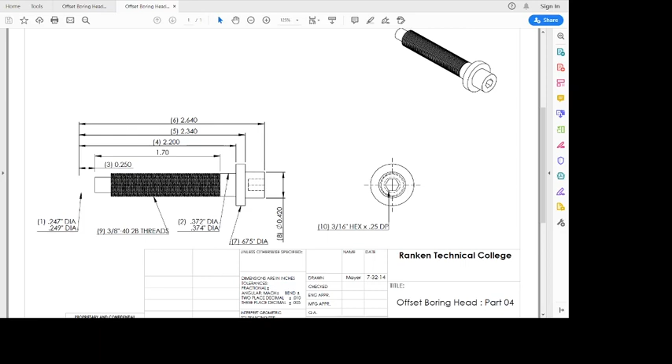As you can see, nothing incredibly complicated here. A pretty straightforward part. On this print, it says to use 1018. I have a lot of students that have used brass. I would prefer using brass if I was making this myself, because you're probably going to have a smoother motion. It won't last as long; the brass will wear down quicker than the 1018 screw will, but it's going to be smoother. It'll look cooler, all that fun stuff.

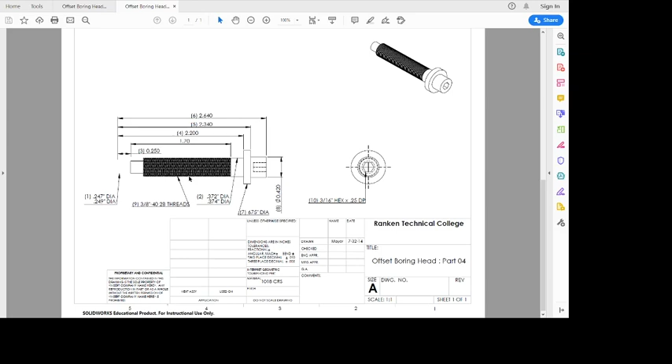So nothing incredibly complicated with this. The only new thing we're really going to be dealing with is this thread. We're going to make an external thread on this. If you haven't noticed yet, when you use the hole wizard, there's a function on there to make an external thread. So let's get started. We are going to make a new part, so I'm just going to use my 3 decimal place template and get that going.

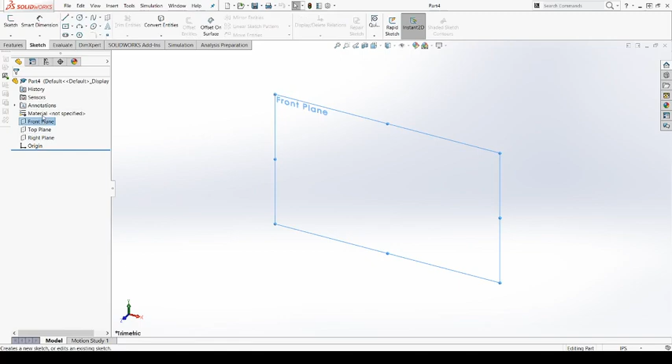All right, so again, we have a revolved part, or a round part, so that just kind of screams out revolve me. Same as last time, we're going to go front plane, and we're going to create a center line. Again, don't have to do this. This is kind of a personal preference. Some people probably say that this is a waste of time, but whatever. Some people used to say that about washing hands.

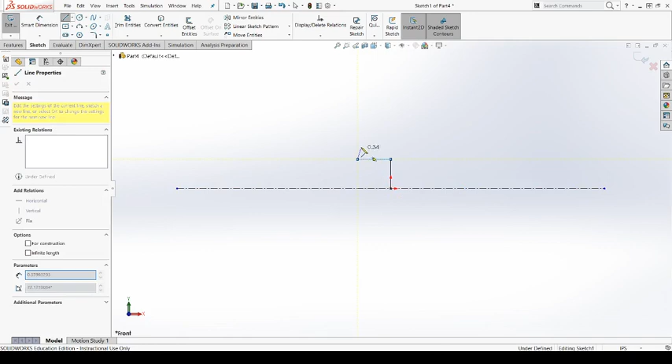All right, so we're going to create just the general outline of the shape. We're not going to get hung up on making this perfect. The biggest thing we want to do is try to avoid snapping if possible. Just rough shape, nothing crazy. From here, I'm going to do my length dimensions first. So overall length is 2.640 inches.

Our... what is going on with this part? All right, I just noticed something's goofy with our print. So I will draw this up. Maybe we'll hold off on Mastercamming this until next week. Next week I was going to get into assemblies and using assemblies to verify our part. So we'll just draw this exactly how it is.

We have this gap here of 1/4 of an inch from this section of our part to whatever this is. I don't know what that is. So we'll draw it like it is, see how it works, and then if we need to change something after the fact, we will. I do not remember seeing this before, so good times. All right, we're just going to draw it like it is in our sketch.

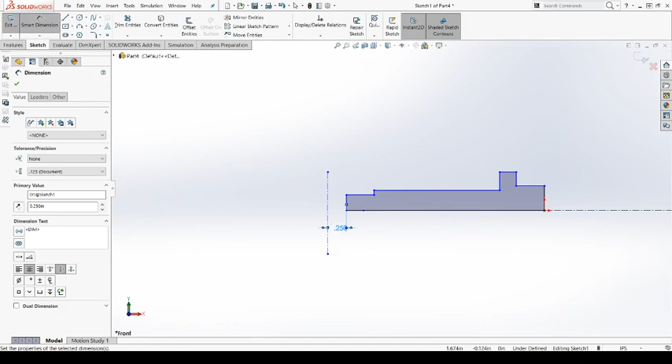Here I can dimension this off of my part. That's going to be 1/4 inch. And now I can just dimension the rest of my part. From here to here is going to be 2.640 inches. From here to here, 2.340 inches. From here to here is going to be 2.200 inches. And then from here to here, it's going to be... oops.

Let's say this is 1/4 inch as well, because that looks like about how long it is. I'm guessing this is just misdimensioned. But anyway, we're going to draw it how it is, so I can show you how this verification part works. All right, so our diameter here is going to be .420.

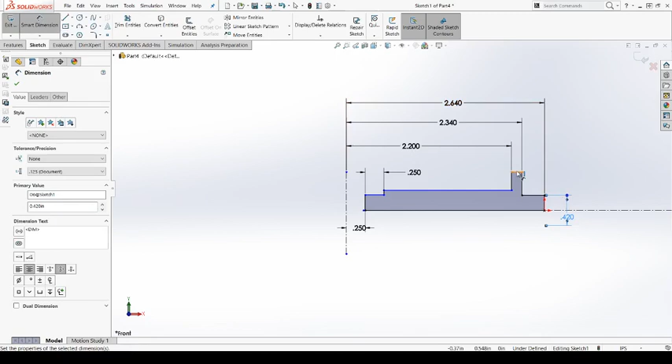My diameter here is .675. My diameter here is going to be .374. And my diameter here is going to be .249.

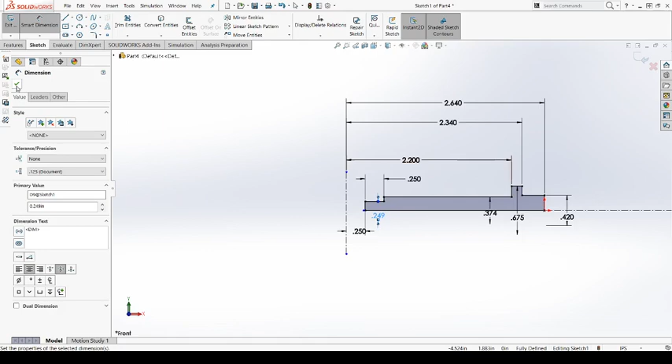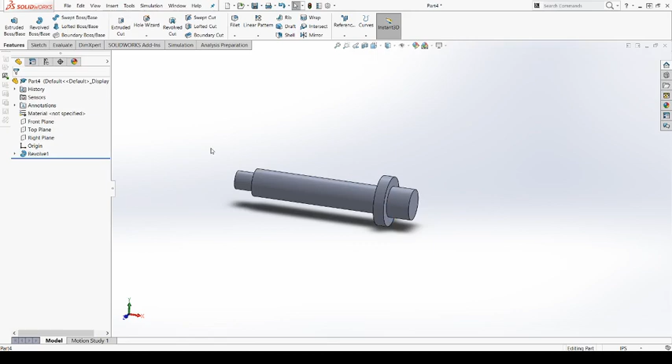Okay, so then from there, I'm just going to do a revolve. Oh, wasn't smart enough to figure out where I want to revolve around. So I'm going to select my center line. And there we go. All right, so we got our shaft here. I'm going to change material just because brass is pretty, right?

So looking back at our print, we have just a couple things to do. So on our print, the only thing we don't have at this point in time is our thread here and this hex on the end, right? So you'll drill a hole here, and then you'll take your broach and you'll basically crush out the brass from the inside of that hole.

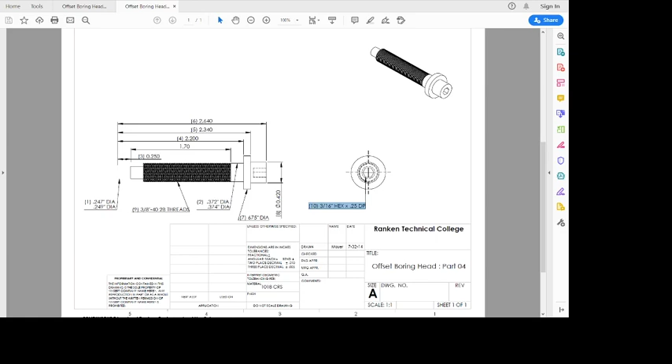All right, so in order to do that is actually pretty simple. We're going to normal to that. I already have the end of my part highlighted, so when I go and create a sketch, it is going to create that sketch using this as my sketch plane. And then from here, I'm going to go and use my polygon tool. So my polygon tool, I'm creating a hex, right? So a hex has 6 sides.

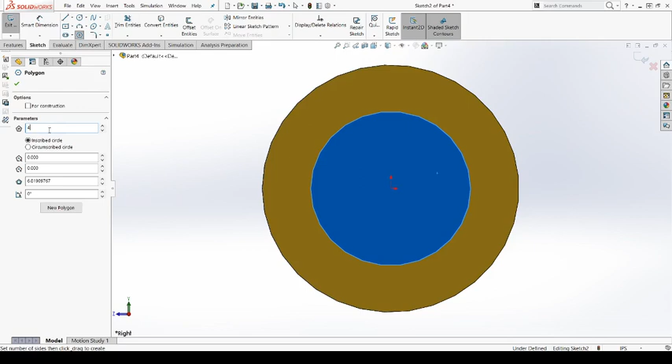If I wanted to create a decahedron, right, I could do that. It's not what I'm looking for. I guess decahedron is 10. All right, so I'm going to look at this. This is a 3/16 hex. So I believe that is an inscribed circle. So we're going to do 3/16 there. I'm going to click. Oops. I'll create that as 3/16 there.

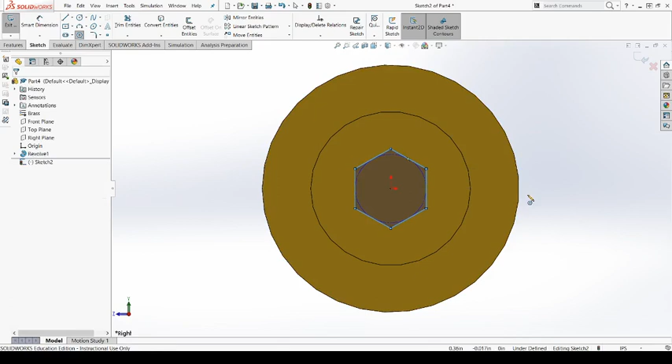All right, and then from there, all we're going to do is just an extruded cut. So that's going to be 1/4 inch deep, so we'll just put .250 for the depth. We'll click OK. All right, it's just that easy. All right, and then the last thing we got to do is you have to thread this.

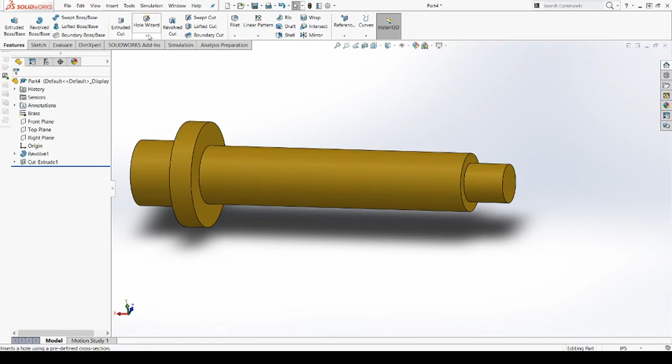Right, so another nice thing about Solidworks, way easier to thread in Solidworks than it is in real life as well. So Hole Wizard depends on the version of Solidworks you have. This is actually relatively new that you can do this external thread in this manner. It used to be a lot more complicated. You used to have to create a helix down here. And you know what? How about I show you the easy way, and I'll show you the hard way. So if we create a thread.

All right, so it's going to give me a warning. So to create a thread, I have to create my thread location. So it's going to say, what's the edge of the cylinder that you're creating this thread on? So also fun fact, it will decide really weird threads based on the diameter of the shaft. So with this, it's a .374 diameter. So you would think that it would default to a 3/8 type thread, but in fact it defaults to a number 0-80. I'm not sure how you make a number 0-80 around that, but anyway. Oh, I forgot about that.

So what we're going to have to do is create the pitch of this because this is a non-standard thread. If we do our thread, it's going to have a standard list of threads that are available to us. So for 3/8 threads, the standards they have are 3/8-16 and 3/8-24, right? So UNC, which is the 16, and UNF, which is the 24. Well, that doesn't really work for us because we need a 3/8-40, right? So we can go in here and change this. If we go down to our pitch, we're going to override our pitch, and we're going to say this is 1 divided by 40, or 25 thou.

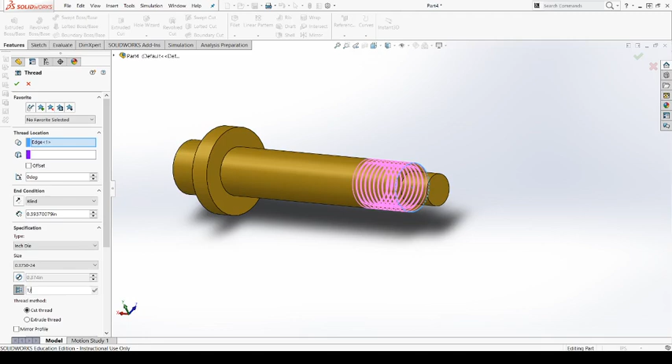All right, so this is an inch die. One way to think about this is if I had to thread this with a tool other than the single point threading tool, what would I use? As an external thread, I would use a die. If it was an internal thread, I would use a tap.

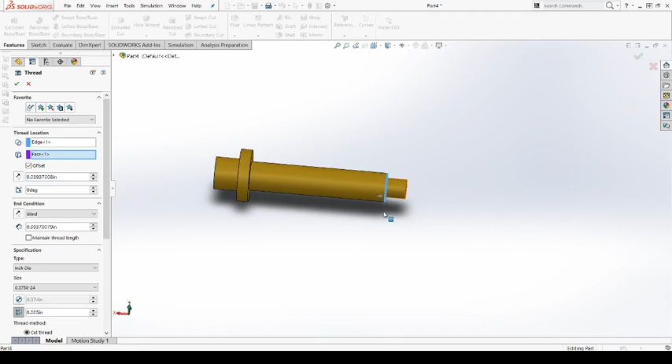So this is our thread location. This is going to be our optional start location. So I'm going to have this as our start location, and then we're going to offset this very, very slightly. Well, we can offset it however much we want. We'll say 0.1. All right, and then end condition. So we're going to do a blind, and this is going to go up 1.700, 1.7 minus 1/4 inch.

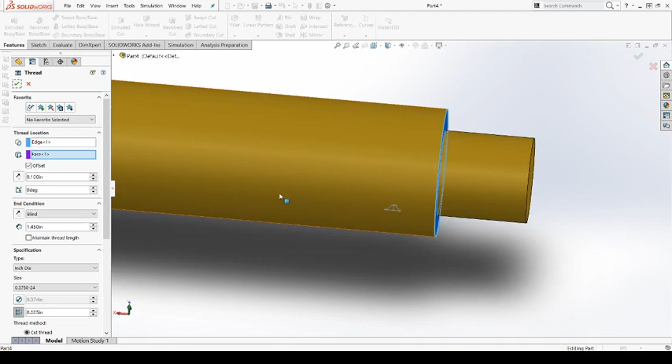What's going on here, guys? Well, it doesn't like my thread. Okay, well, you know what, we'll do it the hard way. This is not something you have to do, in fact probably not something you want to do, but I'll show you how I used to have to do this to create an external cosmetic thread.

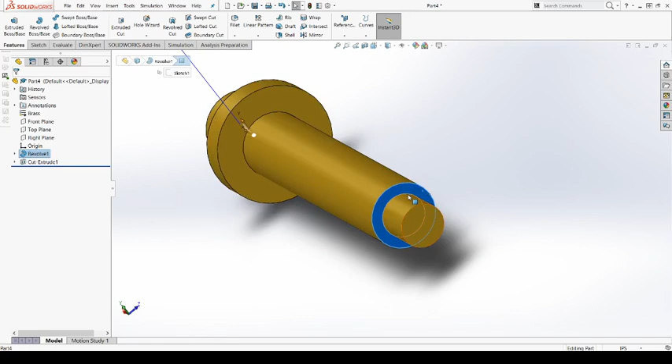So what I'm going to do is create a reference plane because I need to start this thread off of this surface. If I start it on this surface, it's going to have half a thread in my part and half a thread out, so it would start centered on my part and ravel or spiral around. So I'm going to create a reference plane.

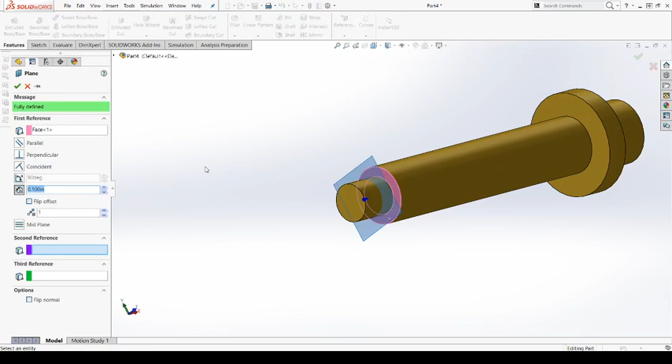I'm just going to offset this off of that part by 100 thou. I can create a plane in reference to almost anything. In this case I'm creating a plane based off of this surface, so by default it creates that plane parallel with that surface, which is exactly what I want. I can change it after the fact to have used different relations to figure out where it is.

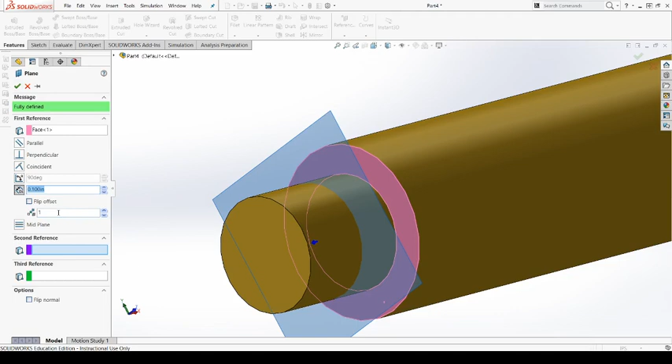In this case I only need one reference for this plane because I'm creating an offset plane - really the only reference I need is what it's parallel with and how far away from that plane it is. I can flip the distance, increase or decrease it, whatever. I'm only going to create one plane, so I'll click OK. Now I have this plane hanging out here, so I'm going to go normal to this plane and create a sketch on it.

Now I'm going to use a tool we haven't used yet called Convert Entities. What convert entities does is create geometry that matches other geometry in a different sketch. So what does that mean? Well, if I'm going to create a spiral, I could just draw a new circle in my sketch, or I could take this circle and convert entities. Hopefully you saw what happened there.

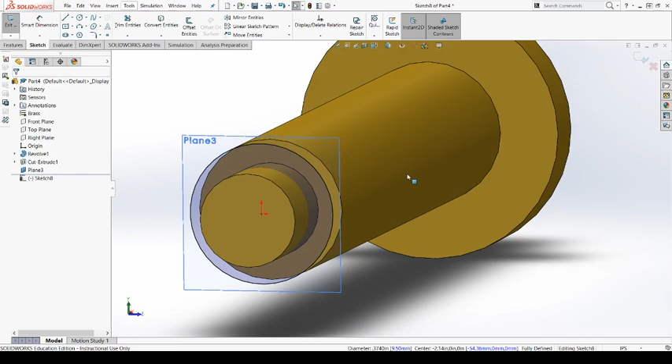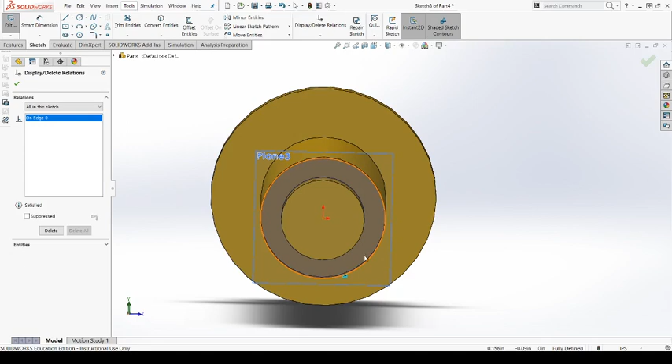I'll undo it real quick. So if I select that circle and select convert entities, it's going to take that exact same circle and put it on my sketch plane - copy it and put it there. At the same time it creates a relation between my sketch and the original geometry, and that's what that on-edge relation is. The on-edge relation just means the edge of this line matches the edge of that line, so the edge of this circle matches the edge of my original circle.

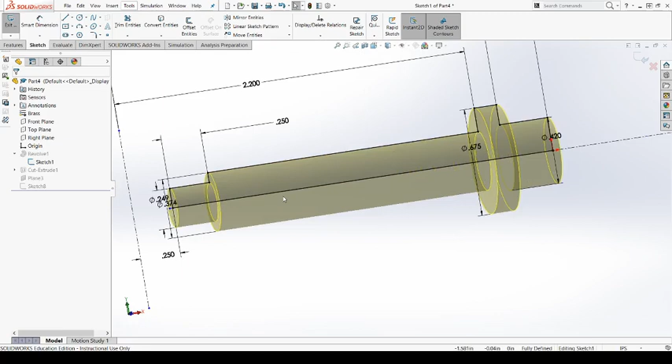The reason this is useful is if I need to change this circle. So if I go into my revolve, go into my sketch - oops, wrong button - I'm going to close this sketch and open my revolve instead. If I go in here and change the diameter, instead of saying 374 I'm going to say this is 450, so obviously significantly much larger.

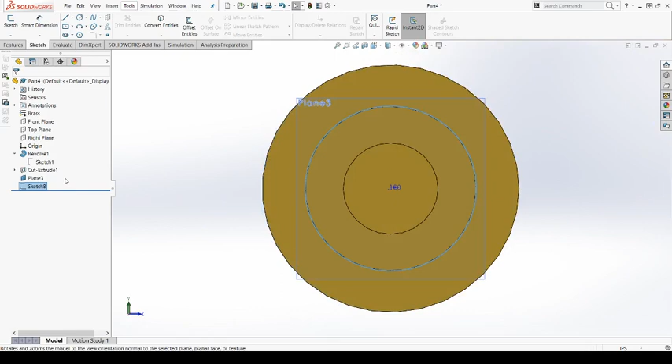When I click OK, what you'll notice is my plane on plane 3 in sketch 8 changed to match my diameter, because since it's on edge, it's just going to match this circle. I don't have to go back - I can just hit undo, and then close.

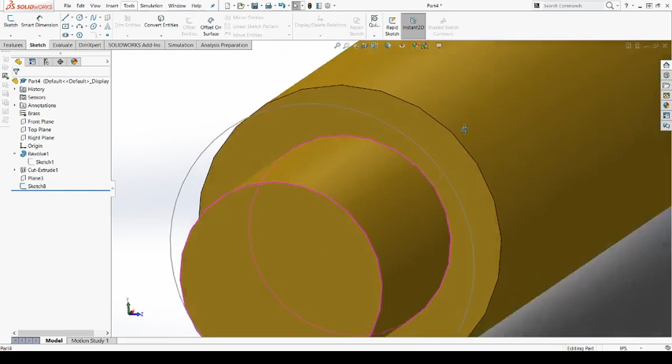Anyway, so I have my original geometry for this guy. I'm going to hide this plane at this point - if I right click on it, there's a little eyeball with a line through it, and that will hide that plane so I don't have to look at it. It's not in the way anymore. That plane will show up for the rest of the sketch if I don't hide it, and I like having a clean workspace.

So our next step is to create a helix. Our helix is going to be made using our features - if we go to features, and over here next to reference geometry is curves, we're just going to create a helix and spiral. Oops, probably shouldn't have hidden that yet. So we're going to go curves, helix and spiral, and we'll start on that plane.

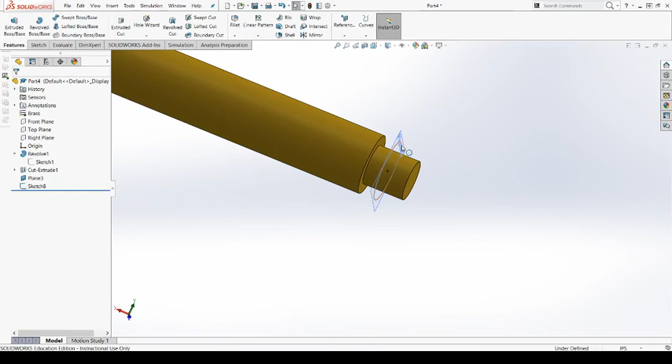There we go, okay, so we're going to reverse that direction. We're going to change our pitch to 1 divided by 40. There are a few different ways we can do this. We can hold down our revolutions button and it's just going to keep counting up, or we can do a distance.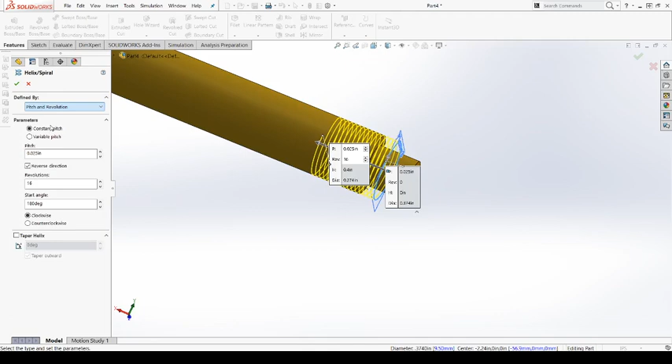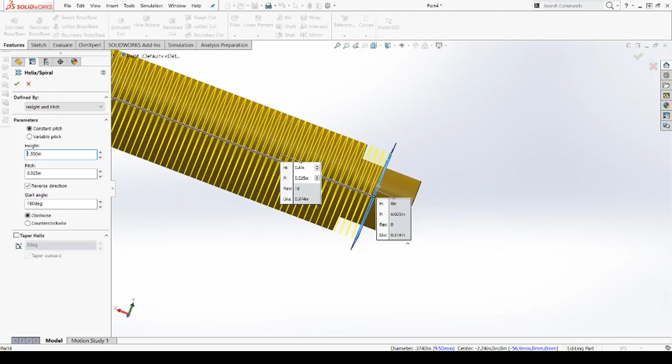So I know this is 100 thou off my part, and so that's going to be 170. So my height here is going to be 1 inch, 700 minus 0.15, 150, and that will put my thread all the way up.

So now I have a helix. I am still not even close to being done, right? I already did my created a plane, created, did my convert entities - some 3 steps in already. I'm not even close to having a thread.

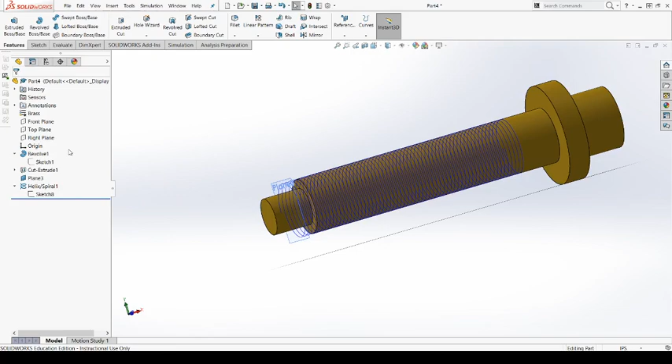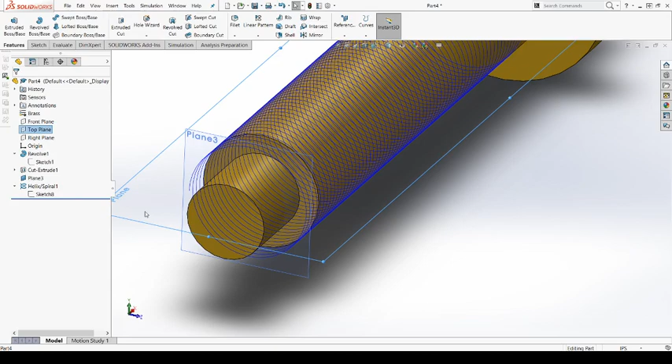At this point, what I want to do is figure out where on this spiral, or where on this part, my spiral starts. So my spiral starts right there. So what I want to do is select the plane that is going to be coincident with that point. This point is going to be starting on our top plane, so I'm going to go normal to my top plane, and then create a sketch on my top plane.

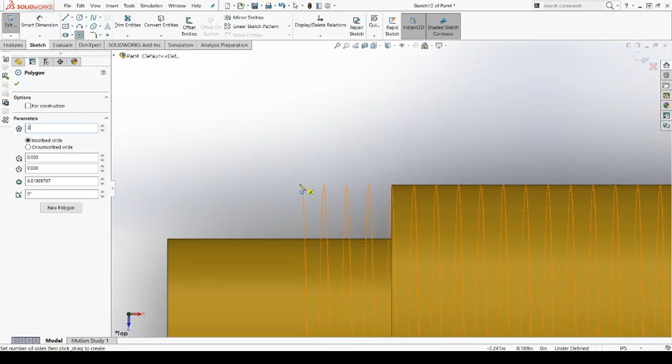Again, I'm going to hide that guy so I can see where this guy starts, right? So if I'm creating this, what I want to do is basically create a triangle. At this point, I'm just going to zoom in, create a triangle, and then I'm going to dimension this from the center point of here to there.

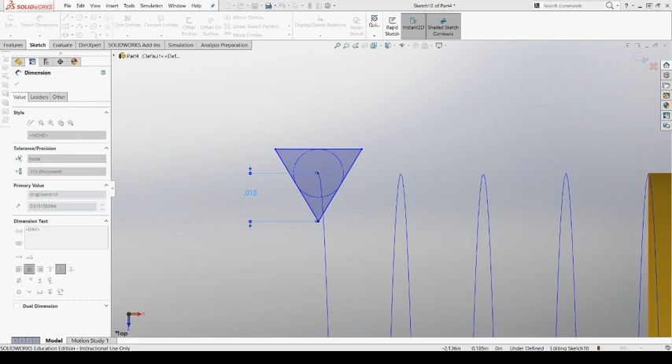And that's my thread depth. So what's my thread depth for a 3/8, whatever? I don't know, I'm just going to guess. So let's say 18 thou. It looks about right. What I don't want is that to be too big, so it looks like it might be kind of close. So let's just say it's 15.

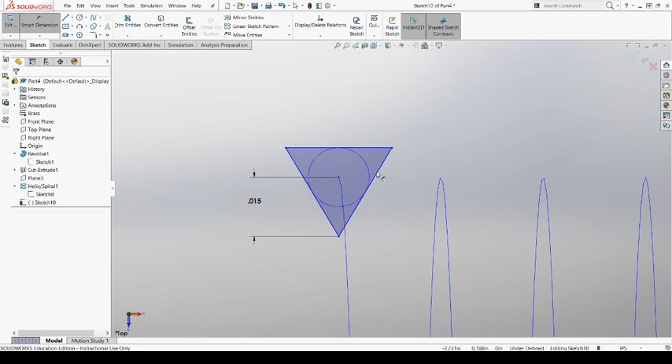Because I think what I don't want to do is have a flat here - I don't want to have these triangles intersecting with each other as they wrap around here, and you'll see what I mean in a second. So now I have two things: I have the shape of this thread, defined by my triangle, and I have the path of this thread, defined by my helix.

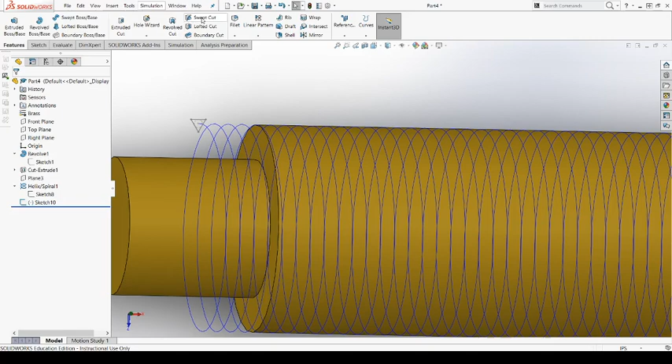At that point, some of you are probably like, well, I know what we're going to do now. We're going to use a swept cut, right? So that's exactly what we're going to do. Good guess. So for our swept cut, we're going to take our profile, which is what we want to cut, and our path, which is the spiral or helix that we're going around.

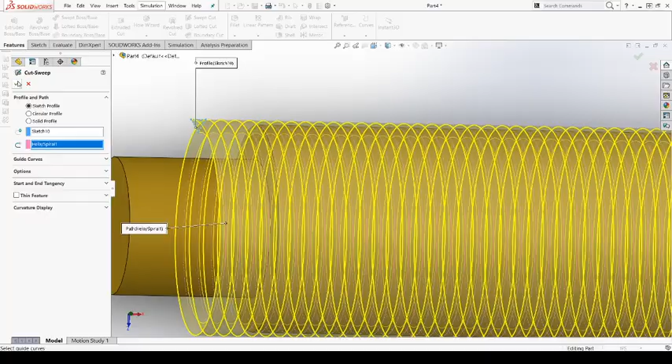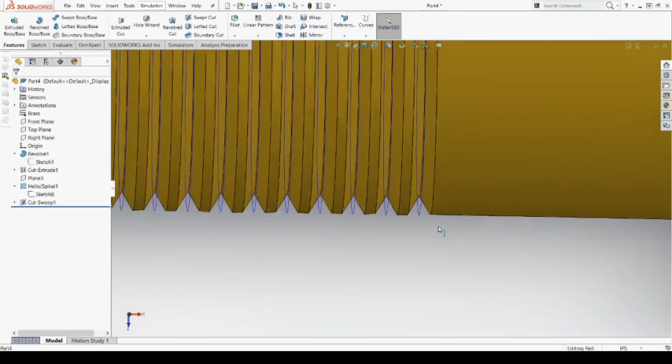Right, so now that highlights - all that yellow is all stuff that's getting cut. So I'm going to click OK. Right, and that creates a cosmetic thread. Now you might be looking at that and going, hey Paul, that's not what threads look like, right?

I mean, what does a thread look like? At the bottom of the hole, we have a radius, and that is a huge flat. So just like with anything else, we can go back and edit this after the fact.

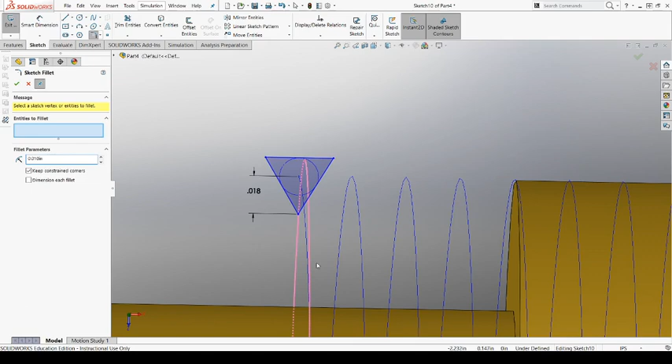So we're going to go in and say, I'm going to change that to 18 again. That's 18, but I'm also going to put, let's say, a 10 thou radius on the bottom of this triangle. Now, let's say a 5 thou radius on the bottom of this triangle.

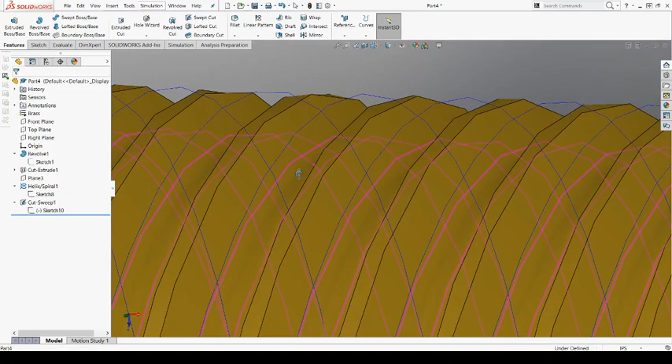That looks pretty big, probably too big. So let's go back and change it one more time, change that to like 2. And I'm going to push that down about another couple thousandths. Click OK, I'll rebuild here.

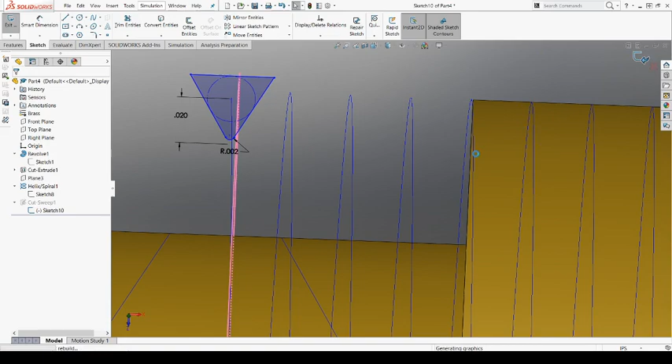Oh yeah, that looks better, much better. That looks more like a real thread, right? Got a little bit of radius in the bottom, just a little bit of a flat on the top. But we still have all this stuff visible, right?

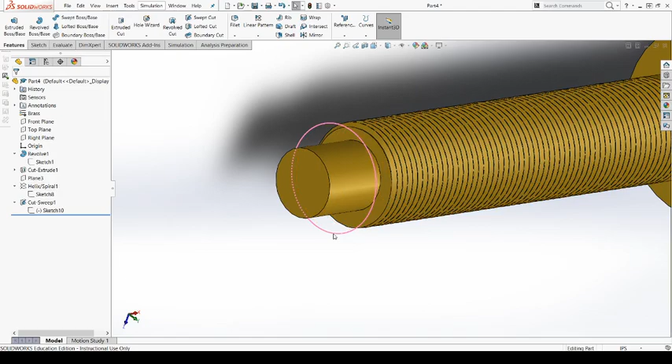So by default, it's going to still keep my spiral visible. I'm going to hide that. Nope. Just not sure what that pink circle is.

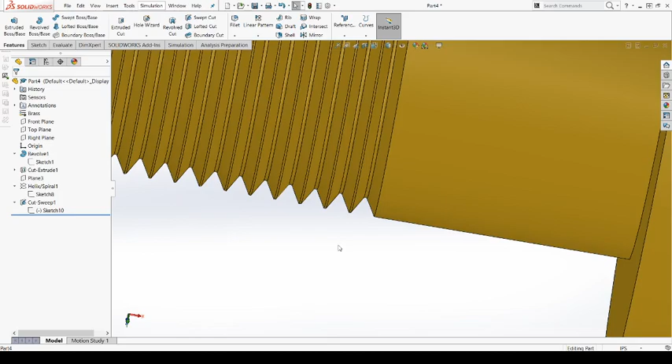But anyway, now you can kind of see we have a cosmetic thread. We cannot toolpath this as far as saying this is the depth of my thread, just go to this point on my part. We don't want to do that. We still want to use our thread depth charts and our pitch diameter charts and all that to figure out how deep to go.

So anyway, before I stop, I'm just going to save this as part number 4. Don't do what I just did, where you create your entire part and then save it after the fact. SolidWorks does like to crash, though not quite as much as Mastercam.

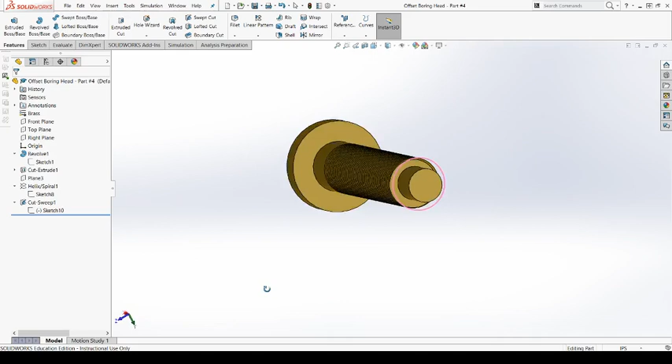But anyway, there you go, we got our part here. There is one thing I would change though. When we're creating this geometry, creating our parts, one of the things we want to think about is how this part is actually going to be made. What kind of tool are we going to use? We're going to use a single point tool on a lathe, a cutter. Well, the cutter has a radius on it, so I'm never going to have actually a sharp corner.

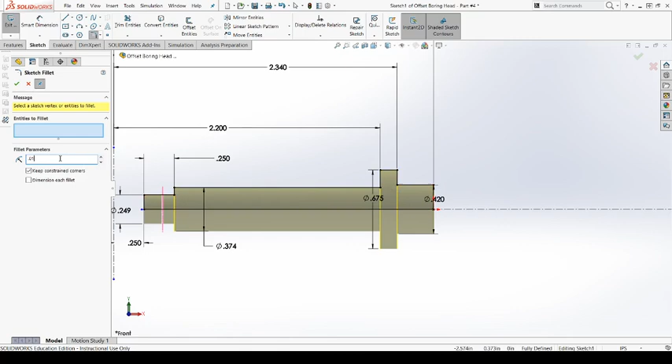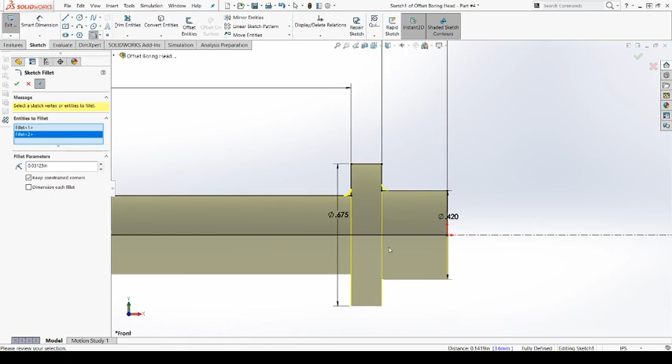So one of the things I like to do is go in here, because if we're going to use our assembly to figure out what our clearances are, we want those parts to be as accurate to how we're actually going to make them. So if the only tool that you have is a 1/32 radius insert, well then you want to do this. If we go through here on all these internal corners, this is going to be more accurate to what this part is actually going to be.

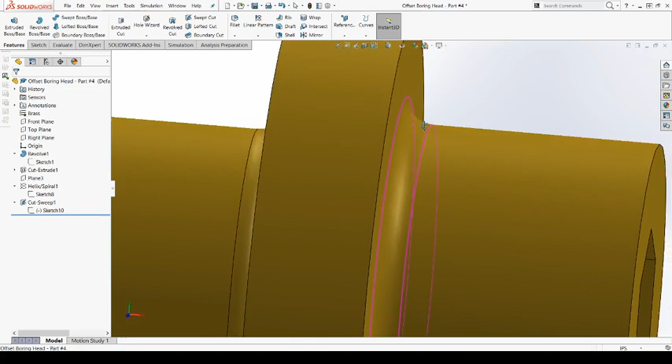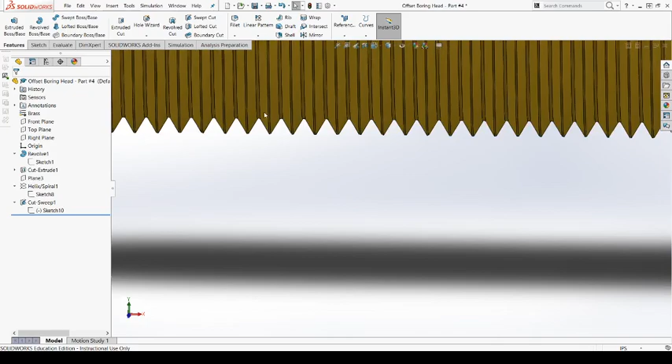Hopefully it doesn't break anything, right? Hopefully that makes sense why I did that, and if it doesn't, it will next week when we put this guy together. So anyway, this part is not really absolutely necessary. I'll mess around with the threading tool a little bit more because I feel like that should have done it, but for some reason it didn't. But anyway, cool threads on there, all that fun stuff.

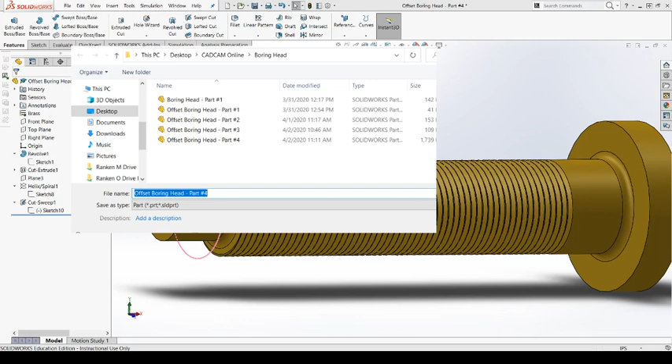The disadvantage about doing this is this file is now huge. So if I go to save as, this is part number 4, this is about 10 times bigger than the next biggest part. Definitely not because of everything that's going on, but really only because of... I guess you probably can't see my save as, can you? No, you can, alright cool.

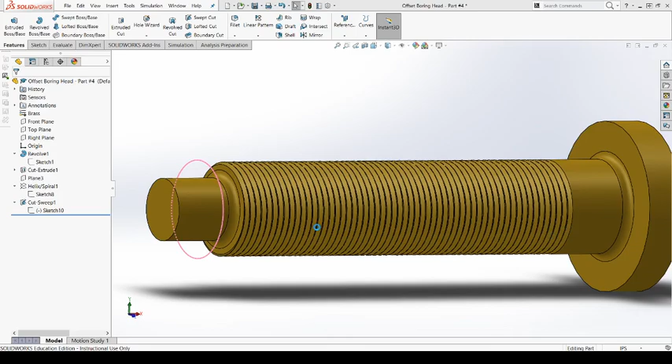So yeah, Part 1 is only 41 kilobytes, Part 2 is 153, Part 3 is 109. This one is 1739, 1.7 megabytes. So that's the disadvantage of doing this, you are creating a much larger file. That's going to take longer to load. If you have a lot of these in an assembly or a lot of them open on your computer, this is going to be a resource hog.

Okay, so this is, like I said, not necessary. Really the only reason to do this is to make your part look like what it's going to look like in real life. So keep that in mind.